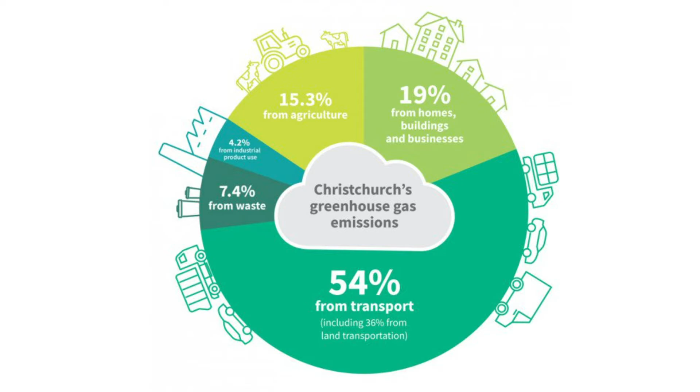So it's emerging that we need to understand where our emissions are coming from and what we can do to change. And I think what we're going to discover over tonight is that we have good knowledge and expertise in this area and what will make an impact in the built environment. And where we are coming unstuck is at the systemic level. It is our policies and our procedures that are leading us down. I think we'll leave here with a better understanding of the leverage points that we have to potentially enact a change. Thank you.

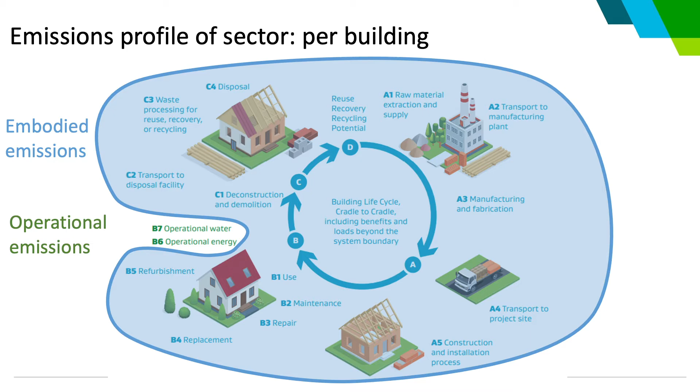But all of those life cycle stages have emissions associated with them, and the embodied emissions are everything in that blue cloud. The operational emissions are the green ones left out of it. The thing about embodied emissions is they're kind of hidden and indirect, and that's historically why they've been hard to measure—harder to see than operational emissions, which essentially come from your power bills.

So that's looking at emissions from the building sector on a building perspective. But what about for New Zealand Inc. per year? A few more numbers here. So what did we hit? 2.7 megatons for Christchurch. For the whole of New Zealand, our annual emissions are 69 megatons.

And our modelling has come up with a number of 15% of that 69 megatons coming from the use of buildings in New Zealand. That's broken down into embodied and operational emissions.

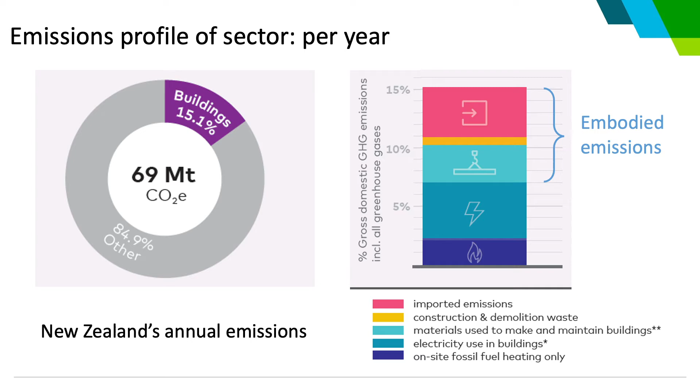So the operational emissions are the lower two bands. The dark blue is burning fossil fuels in the building. The lighter dark blue with the arrow is electricity we use to operate our buildings. But those top three bands are all your embodied emissions—the stuff from material in buildings, the stuff from waste in buildings, and the pink one is important: it's the stuff from material made overseas and imported into New Zealand. But that's still counted as emissions from the building sector, emissions that we drive every time we build a new building.

So what's the government doing about this? We're all hopefully aware of the Climate Change Commission. They published their final advice on how we're going to meet our zero carbon by 2050 goal a couple of weeks ago. That's going to result in the government responding by publishing a national emissions reduction plan by the end of the year—the government has to do this, that's what the Zero Carbon Act passed in 2019 said we would have to do. For the building and construction sector, we've responded by launching the Building for Climate Change programme, which is the programme I'm involved with in MBIE.

So last year we published two frameworks for public consultation. They contain proposals to regulate the operational emissions from buildings and the whole of life embodied carbon emissions from buildings. That's what I'm talking about now—Elrond will talk about the operational one later. So, whole of life embodied carbon emissions reduction, bit of a mouthful—I like to call it WOLEC.

The headline of the framework that was published is we're going to start with new buildings. Every time you build a new building, you have to tell us what the embodied carbon of that new building is. The next step, once we're all used to doing that, is we're going to introduce a cap on embodied carbon—you won't get a building consent until you can show your embodied carbon is underneath that cap. Then over time, we'll gradually reduce that cap in line with our national emissions reduction targets.

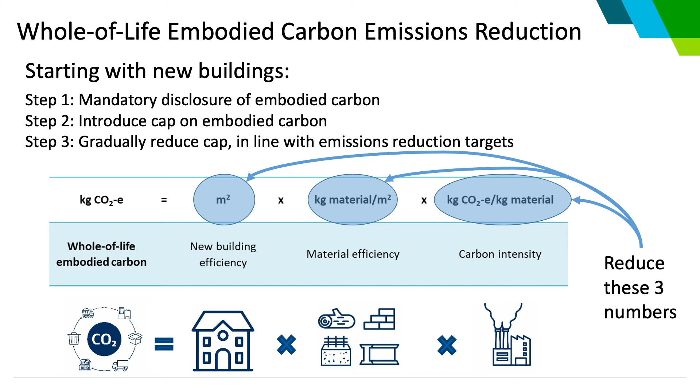It's the amount of stuff we build, that's the metre squared stuff. It's the amount of material we use to build that area, that's our material efficiency. And then it's the amount of carbon associated with that material we use. So in essence, everything we do to achieve the objective of reducing whole of life embodied carbon should link back to reducing one of those three numbers.

And I want you to think about those three numbers. Reduce those three numbers. So how do we do that?

I'm really glad we've already heard about the term carbon literacy. It requires a bit of number crunching and requires us to be more familiar with the numbers and the magnitude of the impact and what a kilogram of carbon means. So it's really important that it's not just for specialists, but for everyone involved in the building sector.

If we're going to do this, we need to do it together. We need to know what our impact is. It can't be something we package up into a black box and ask someone else to deal with. So we all need a kind of gut feel of what a good embodied carbon result for a building is over the whole of life. Because if we want to reduce that number, we're going to have to quantify it. We can't reduce something if we don't know where we're starting from.

But the good news is that there is growing interest in this. Popular science books telling you how much carbon is in your banana are becoming more and more popular. There's a growing interest in doing this. And what we want to try and do is empower people, give them the tools they need to do this.

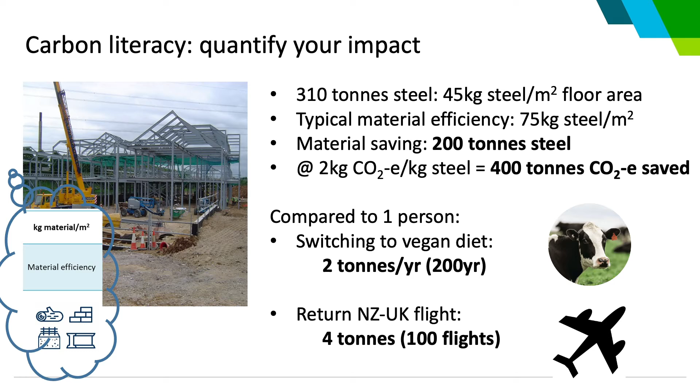And going at about 2 kilograms of carbon per kilogram of steel, that's about 400 tonnes of carbon saved. So going back to those three numbers, that's the middle number, material efficiency. By being able to reduce that material efficiency number, I've saved some carbon and I'm able to quantify it.

But what does it mean? So I could compare it to a couple of things. I could compare it to switching to a vegan diet, which is worth about 2 tonnes per year per person. So it's about 200 years, or 200 people going vegan for a year.

Or flying back to the UK to see my family, I could do that about 100 times for what I did on that building. And that's not to say we shouldn't all be switching to vegan diets and reducing our flights. I think what I'm just trying to illustrate is that in my role as a graduate engineer straight out of university, I had the power, and it's a real privilege, I had the opportunity to make that change and to have that impact in my day job.

And that's the sort of thing that everyone in the building sector needs to grasp hold of, understand, and take those opportunities. It's not a new thing. I like to use this example as what I'd like to think of as an early example of carbon literacy.

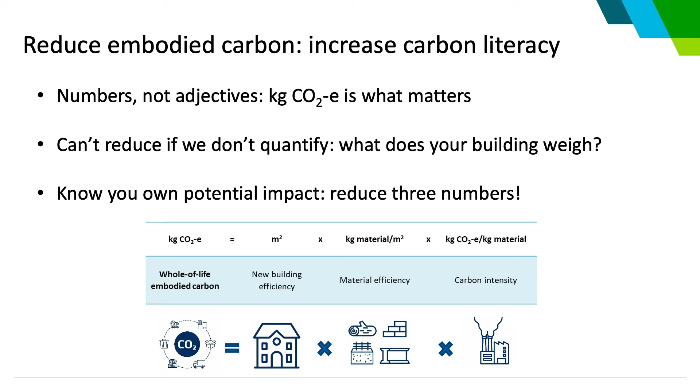So everybody who's involved in any way with buildings, know what your building weighs, and then know your own potential impact in whatever role. I've explained my role as a structural engineer, but there'll be all sorts of different opportunities for different people in the building sector to reduce their impact. So think about how you can reduce those three numbers. Thank you.

So, my name is Scott Watson, and for those of you concerned, I'm not on day release from prison. It's a different Scott Watson up here today. I'm Business Development Director, according to that, for Naylor Love. So I'm one of those evil builders that builds these carbon-emitting buildings all over the place.

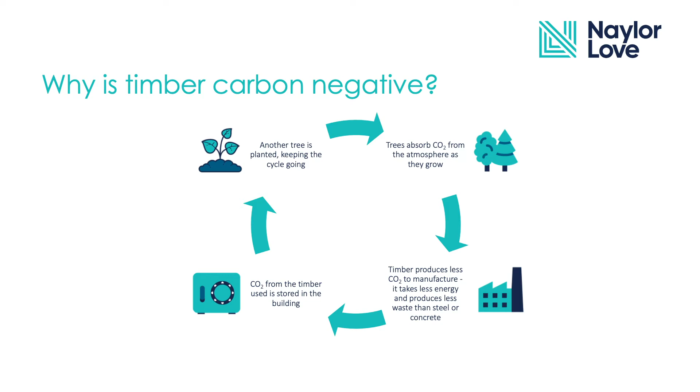We won't go back through the whole carbon cycle since we've covered that with other speakers, but the important bit here is engineered timber. We all know it sequesters carbon as it grows. We know it takes very little energy to produce compared to concrete and steel. And we know that as long as we plant another tree, the cycle continues. So if we chop down the Amazon forest and don't plant any more trees, we shouldn't be building out of timber. The sequence works as long as you continue to build out of timber.

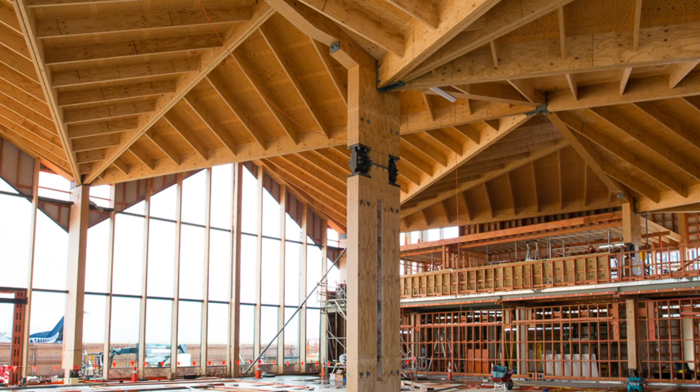What sort of stuff can we build with timber? Pretty cool building - that's the Nelson Airport. Full seismic load taken by the timber with these expensive little brackets here. The more simple structures - I think there's Rangiora High School, Redcliffs Primary School.

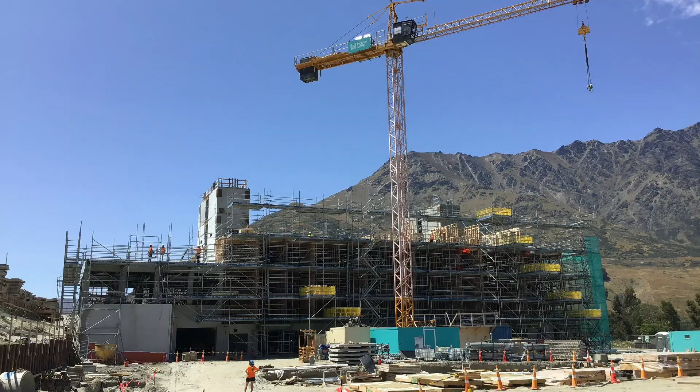This is a hybrid building, so you can see the concrete structure in the middle. What the concrete structure does is take the seismic load, and the rest of the building is timber, which takes the gravity load. Through the studies we've done, we've basically come up with that as being the most economic commercial structure to build.

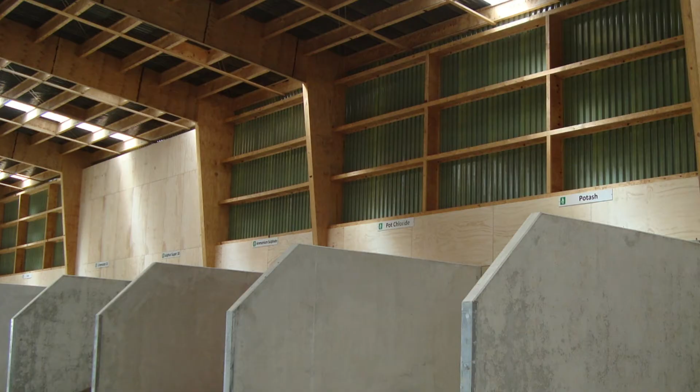Industrial buildings - this is a fertiliser works. We didn't build this to save the planet, we built it so it wouldn't rust. We got some brownie points though.

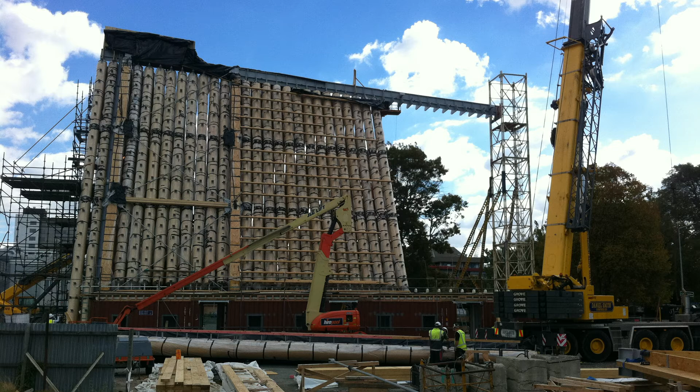And the Cardboard Cathedral, which is actually a timber hybrid building - inside every cardboard tube is a timber beam. Sort of like shooting Santa Claus, isn't it? Sorry about that. It's not cardboard at all.

What carbon savings can we achieve with engineered timber? So we set about measuring these. We took a sample building which you've probably walked past, Bedford Apartments.

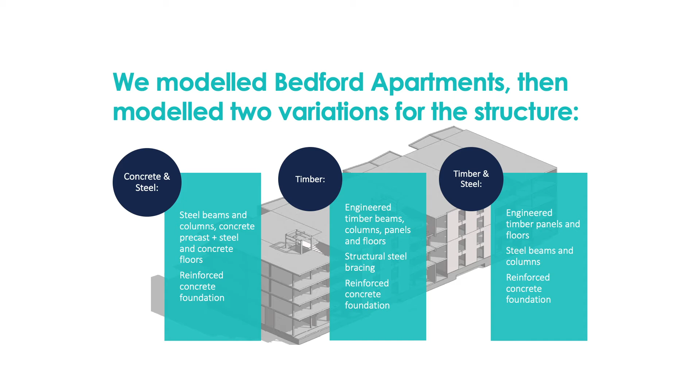These are just down the road - a standard, modest sort of 4 or 5 story building, quite correctly built out of concrete and steel. We then redesigned it in 2 different ways: a timber version, which is almost all timber but still had concrete and steel foundations, and a hybrid structure, which is timber and steel hybrid.

We then created our own carbon calculator, basically the equations we've been dealing with before, but we created a database of all the materials. So very briefly, when you measure these materials, there's the 3 different designs and the 3 different amounts of material. We saw that in the 2 on the right, we still have a lot of concrete and steel, so we thought the carbon saving would be fairly nominal.

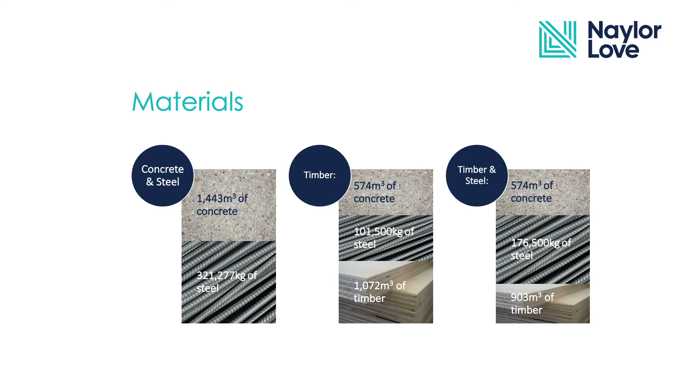Anyway, we carried on and the saving was over 90%. So even with a real modest amount of timber put into the building, you can see on the far right - sorry, left, no, you're right.

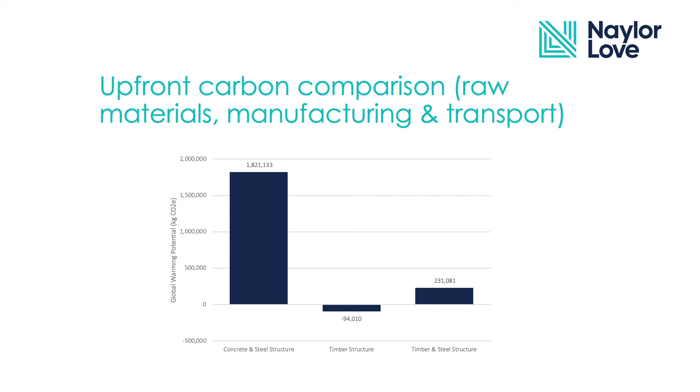The difference between the hybrid structure and the almost total timber structure is quite small, but the difference in cost is significant. For that particular building, the cost to build the hybrid, which is on the far right, is comparative to the concrete and steel. It's a little bit more expensive, but comparative. If we went to almost 100% timber, the cost goes quite high. But it shows with the hybrid structure you can achieve a significant saving.

Trying to do a comparator to that, for that one rather modest building, we were saving the equivalent of burning 1.167 million kilos of coal. So while it's great to do our hybrid cars and electric cars and waste control, we have to realise that just a nominal change to some of the building materials makes a massive effect on the environment.

It was at this point in time I had a Jacinda moment, which is not like me and actually quite disturbing. Come on, Jacinda, don't let me down.

That saving that we made was the same as 100 people, which is probably what we've got here, driving electric vehicles for 8 years. That's a lot of electric vehicles and a lot of people. All that saving was just done by one building, changing some of the materials to timber.

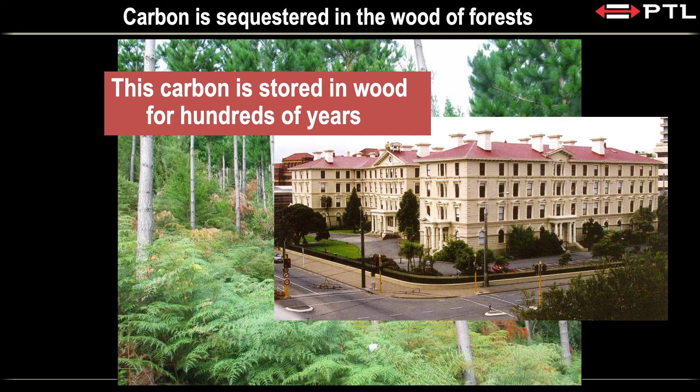Trees. This is the forest I own up in Marlborough. And what's in those trees? About half of the weight of the wood in those trees is carbon. There's carbon in those trees, and that's why people plant forests to sequester carbon. You can do lots of things with carbon in trees because it can be stored in the wood. And if you build a building like this, you know that building?

Old government building in Wellington. It's been there since 1876. I haven't got the numbers on that, but there are hundreds of tons of carbon stored in that building, and that carbon is in the building. It's not in the atmosphere.

If we want to encourage this, what I like to think about is something called a wood first policy. There's a little bit of history here, because way back about 15 years ago, when Jim Anderton was Minister of Forests and Deputy Prime Minister, he set up a wood first policy in New Zealand. Most people don't know about it. British Columbia followed New Zealand and set up a wood first policy. The state of Tasmania did the same thing. The city of Rotorua has done the same thing. What about Christchurch? Well, all of those previous places are timber towns, forestry.

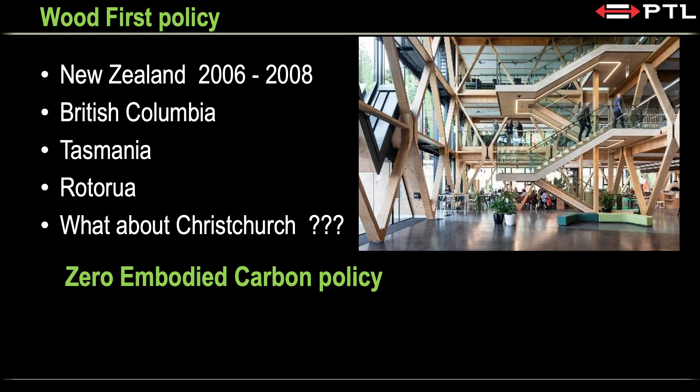I think in Christchurch we should have a zero embodied carbon policy. What does that mean? It means if we decided for all of our new buildings that the carbon sequestered in the wood offsets the CO2 emissions from making all the other materials in the building, that would be zero embodied carbon. It would just be what you'd seen from Scott and from Katie.

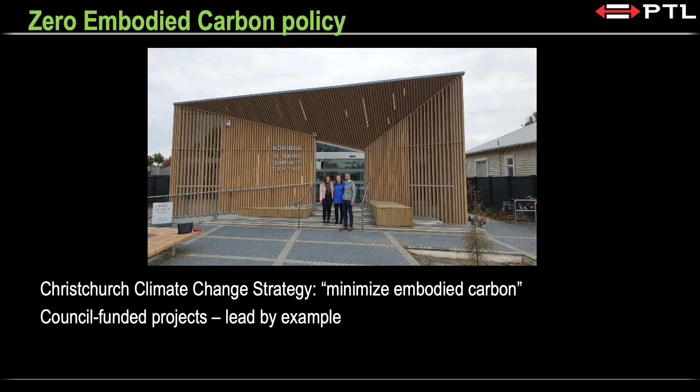As an example, let's look at the St Albans Community Centre, the same building shown on the brochure here. I was at that building at the official opening about 3 weeks ago, and our Mayor, Lianne Dalziel, opened the building, and I asked her afterwards, why didn't you say something about the carbon? Well, we heard about it tonight. Sarah told us about the carbon in that building, because that's how the building was built.

It's all built out of wood. There's no concrete in that building. It's got wooden panels for the floor and for the walls and for the roof. It's made of something called cross-laminated timber, for the walls and the floors. There's about 150 tonnes of wood in that building, which is equivalent to 180 tonnes of CO2 sequestered, the numbers we talked about. And the simple number I like to think about, I did a quick calculation.

If you drove your car for 1 million kilometres, this would offset the driving of your car for 1 million kilometres. It's a huge amount of carbon, but one's not enough. It's even better than zero embodied carbon.

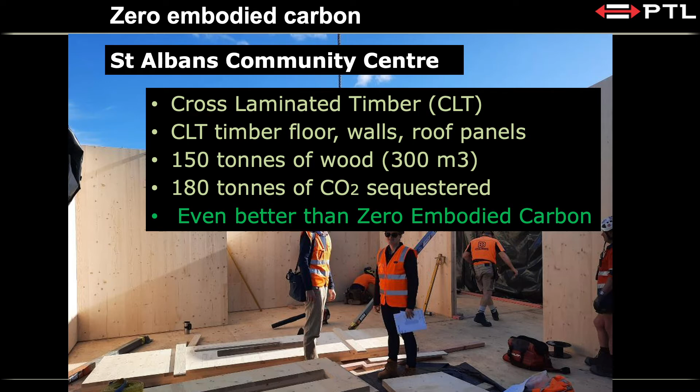It's carbon negative. So there are lots of other reasons for building in wood. The low carbon footprint, it's a renewable resource, lovely appearance, healthy environment, time and cost benefits, lightweight structure, earthquake resilience, top quality performance. There are lots of other reasons for building in wood, not just the carbon footprint.

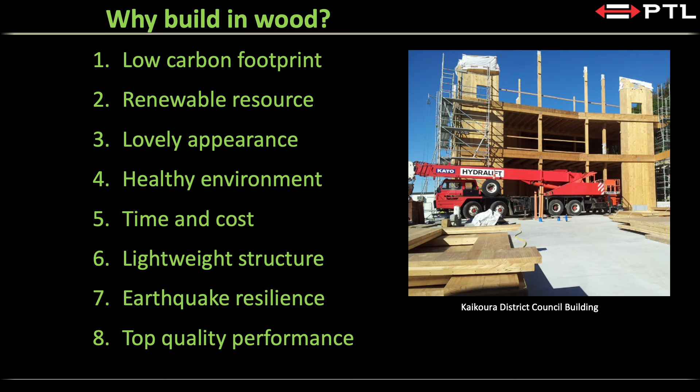But it's not so easy because there's a lot of resistance. So how do you get more timber buildings? Well, you lead by example, as Christchurch City has done with Mount Pleasant Community Centre, St Albans Community Centre and others. Then we have to support the public demand, encourage building owners, and celebrate the successful projects.

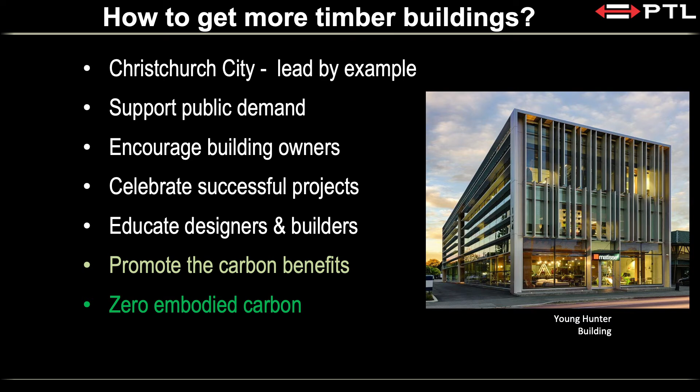With some education for designers and builders, and promote the carbon benefits and the concept of zero embodied carbon. Here's another building on the right, the Young Hunter building down next to Vic's Cafe, Victoria Street. That is all a structural timber building with zero embodied carbon.

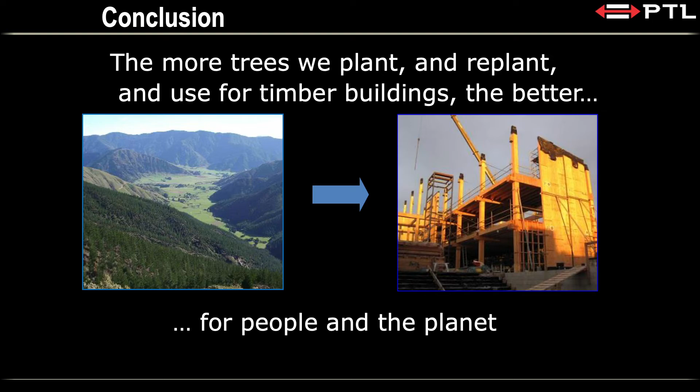So my conclusion simply is this: the more trees we plant and replant and use for timber buildings, the better it is for people and the planet. Thank you.

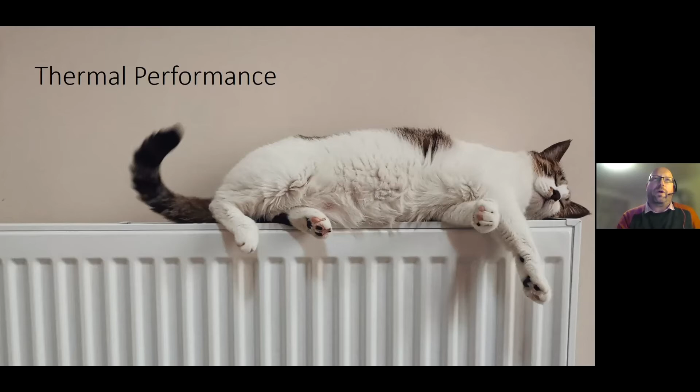Then the other aspect of thermal performance, which is really important, is that it relates directly to the health and well-being and how we experience our buildings. I think one of the things we've got to really keep in mind all the way through this process, as was touched on by one of the very early speakers, is that buildings are for people. So people need to be at the centre of what we're doing when it comes to climate change action and the way we design and build buildings also.

It's quite possible to think about low operational emissions for buildings as being about putting another jumper on and trying to keep warm in a very poor indoor environment, which I think most of us in New Zealand have grown up with. I grew up in Canterbury, just outside Christchurch, so I'm quite familiar with very cold winters, wearing more layers of clothes and seeing my breath in the morning.

But that's not what we want to achieve with this operational efficiency being brought in as part of building for climate change. We want to see that as buildings get more energy efficient, indoor environmental qualities - how warm and dry and well ventilated they are - are also improving at the same time, not being compromised. And these things have a relationship between them.

If we want to simply improve indoor environmental quality, we should probably just heat and ventilate our buildings a lot better than we typically do. But if we do that, we inevitably use more energy because we have to use bigger heaters, more often.

If we go the other way and say we just want to reduce energy use and operational emissions without thinking about the other things, you can have a negative impact on indoor environmental quality. Even if you put another jumper on, if your house is cold, it's not going to be good for your health or well-being.

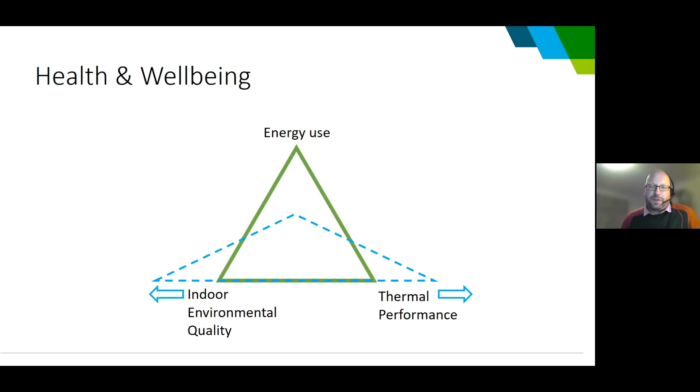I wanted to touch on a couple of things Katie already picked up on. Other things the government is doing in this area include a carbon neutral government program, where all ministries and agencies need to reach carbon neutral in their operations by 2025 — I believe this also impacts local governments. This means reducing operational emissions, reducing embodied carbon emissions, and then offsetting whatever remains once they've achieved the reductions they sensibly can.

We're also looking at energy performance certificates. These have been brought up a number of times — it's a way of rating a building to show how well it performs in terms of the energy needed to keep it at a good temperature with a healthy, comfortable interior.

All the different parts of government are responding to the Climate Change Commission's final report, with different aspects covered there. This year there's a lot of work being done on the emissions reduction plan, which we expect to be published later this year. So that's a brief overview of operational efficiency, and I'll pass on to the next speaker.

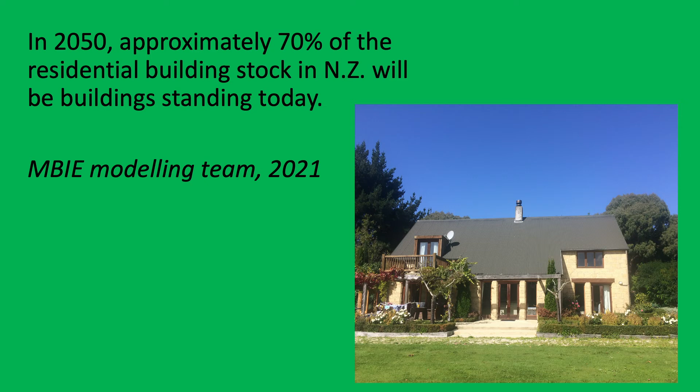So in 2050, 29 years from now — that's about my age — I understand from some figures Katie's team gave me, from their modelling team, approximately 70% of the residential building stock in New Zealand will be standing, or will be the buildings that are standing today.

New Zealand statistics indicate there are about 1.8 million dwellings currently standing. Now, we're going to have growth and clearance, but for the sake of this presentation, let's just say the same amount will be around in 2050. So in 2050, about 1.25 million dwellings will be from 2020 or earlier.

This is going to be a similar position to other developed countries. So it's critical, in terms of reducing energy use and achieving our greenhouse gas emission reductions, that deep retrofits are carried out on existing stock.

Right, you can quote me on that, because I said it, okay? That's my quote. Everyone now needs to be an activist right now, not tomorrow, not in 5 years' time, right now.

Renovate, refurbish, rehabilitate. It's likely that if we shift our focus almost completely to the rejuvenation of existing buildings, and have the reduction of energy use at the core of that focus, every project carried out will be a retrofit project. And they have to be, because we don't have any other choice.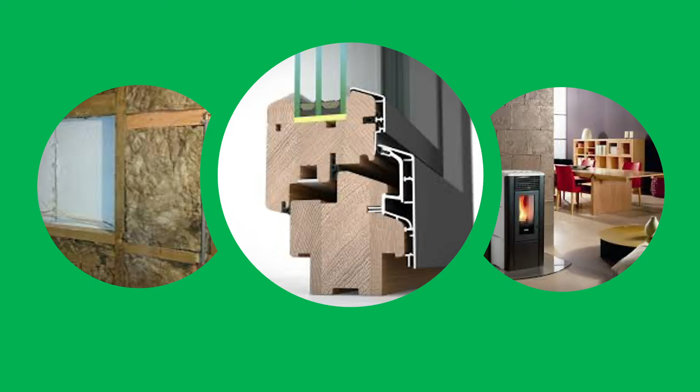If we think about retrofitting just in the residential sector, we can just consider things like swapping out single to triple glazing, putting insulation in walls, roofs, anywhere you can fit it, and perhaps whipping out the old open fire for a wood fibre pellet equivalent.

In the commercial sector, wrap up buildings with external insulation, put on new veneers, finish off with new glazed balconies.

This project I co-managed back in 1998 in Norway: 3 tower blocks, 10 stories, 200 plus apartments. It was award-winning, but they didn't tell me at the time until I left the country. I found out 2 years ago.

Conventionally, such refurbishment work is focused on a number of single-step measures which overall improve the performance of a building, either deliberately or unintentionally. But there's generally little thought in promoting the improved performance, how it might be demonstrated, or how it will benefit stakeholders, either immediately after the works or during the remaining life of the building. And the benefits of retrofit are unlikely to have been determined at the design stage. And the influential assessment criteria upon which the project has progressed is generally cost versus asset value growth.

This is just sort of standard retrofitting, just adding something that wasn't there before. The long-term benefits to occupiers or owners will initially be largely only perceived and found on subjective reasoning rather than the consideration of demonstrable outputs from the setting of measurable targets.

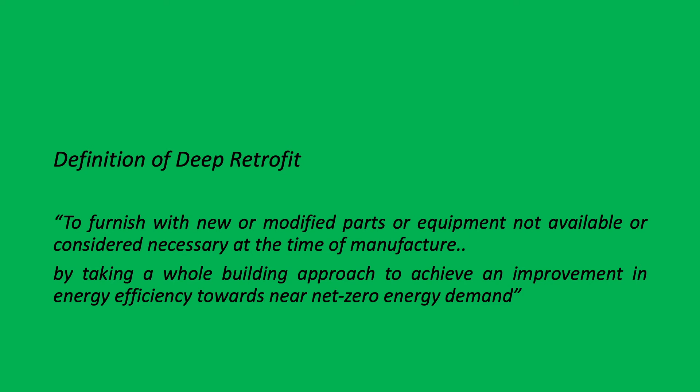In addition to the definition of retrofit, I've added taking the whole building approach to achieve an improvement in energy efficiency towards near net zero energy demand. And now we're wanting to start focusing on performance and reducing energy use.

This picture has been taken from Archetype's website. Thank you, Tim, and the team down there in Dunedin. They looked at retrofitting an apartment flat, I guess, or an apartment in a block.

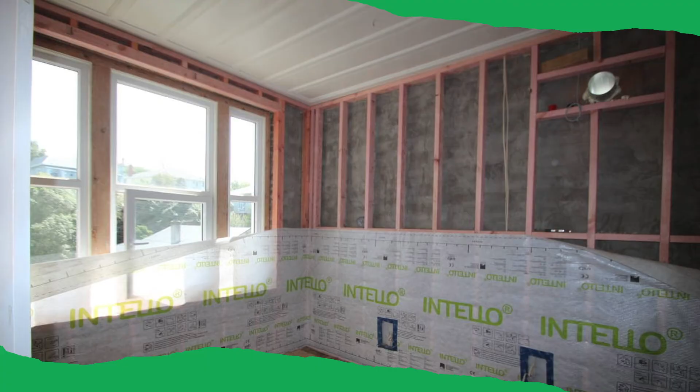And here the people have started going a bit more hardcore, stripping out plaster from external masonry walls, putting in new insulated timber walls inside the envelope, airtightness membrane, up with the floor, more insulation, more membranes, and so on and so forth. Whopped in some through-the-wall MVHR to reduce moisture build-up and to warm the incoming fresh air.

And further along the residential line, Kāinga Ora have already retrofitted 200 homes in the Hutt Valley, and they plan to retrofit 1,500 more in the next 2 years, as part of one of their performance-focused retrofit projects nationwide.

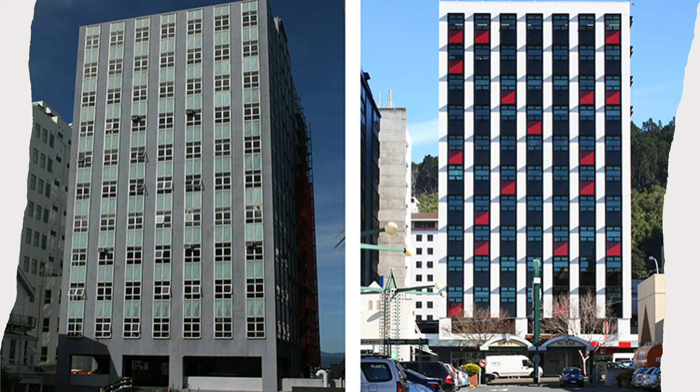Deep retrofit in the commercial sector. This is about 10 years old now. It's Aorangi House in Wellington. It was a Beca project, 2009. And they basically added the things that were on the project before in Oslo, but gone infinitely further.

Installed external insulation and new veneer, high-performance glazing, solar shading, temperature and air quality sensors, exhaust fan to aid ventilation, variable refrigerant flow comfort cooling design, and worked on the elimination of thermal bridges.

So the whole performance of the entire building is considered - in this case, the performance analysed for optimisation during the retrofit.

If you haven't checked out Professor Johan Rockström, go and check it out.

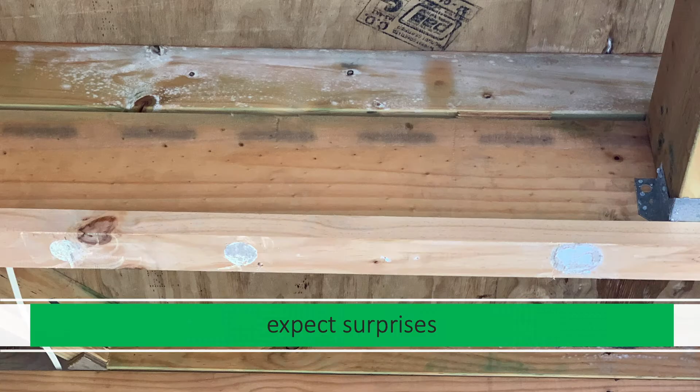The final stage really was just looking at passive house style retrofitting at EnerPHit. One example here was Piha House. They're looking to certify it this year. It's by Sang Architects, Daryl Sang and his team up in Auckland, and it comes with the need to expect surprises and pay attention to a lot of details.

And I'll just leave you on that note.

Kia ora koutou. My name is Shay, and I'm the head of strategic partnerships at Tether Limited. Prior to Tether, I led the development of the Environmental Upgrade Finance Program in Australia.

Tether provides hardware for measuring building performance, and our devices are very easily installed. It can be done in 30 seconds. They run on batteries and do not rely on Wi-Fi connections to transmit data.

So today I'm here to talk to you about PACT, which is Property Assessed Climate Transformation. PACT is a loan. It is secured by a voluntary targeted rate on the property. It can be used by homeowners as well as businesses.

The term of the loan can be up to 20 years, and the interest is fixed for the duration of the loan. The loans range from a few thousand dollars to millions of dollars, and the funding is provided by the private sector. It can support building owners and tenants too.

PACT overcomes financial barriers that typically discourage investment in retrofits of existing buildings. The long-term tenure of the loan makes the loan repayments easy, and therefore it becomes a cash flow tool for the building owners. In particular, it could be used for healthy home upgrades, green retrofits or deep retrofits, as well

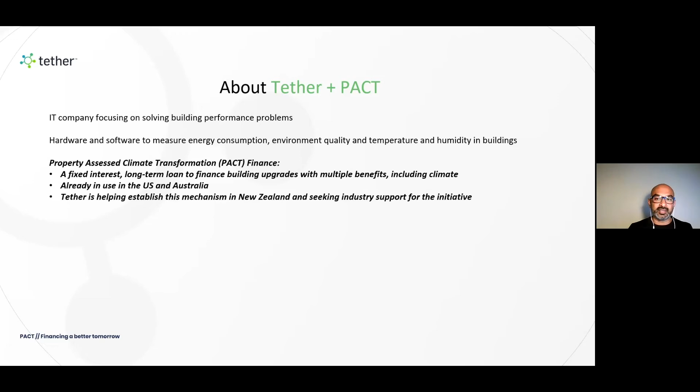Similar finance mechanisms are also under consideration in Europe, UK, Canada, and South Africa too. It is enabled by a tripartite agreement between a building owner, their local government, and a lender.

Voluntary targeted rate programs are already operating through Canterbury programs and building retrofit programs in Auckland City. PACT is very much aligned to these programs and can also be used for non-residential buildings. It also allows for a wider range of improvements so long as they deliver a healthier space and a more efficient building, and the funding is not limited to council budgets.

I'd like to run you through a series of examples of projects that have been funded by similar finance mechanisms in Australia and in the US.

First, we have a commercial building refurbishment. This building was built in 1936. It's in Melbourne CBD. The building had aged and had a poor NABERS rating. The building owners used bank loans and environmental upgrade finance, which is what PACT is. And they were able to do deep retrofits and lift the NABERS rating to 3.5 stars, which enabled them to source a long-term tenant. We work on a 15-year contract.

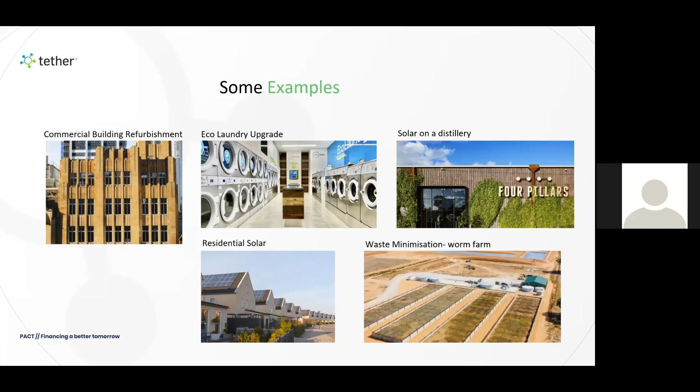So what they did is they installed 4 swimming-pool-sized worm farms at the cost of $4 million. And those worm farms treat 120,000 kilolitres of water, and that gets put back into the irrigation system each year. Prior to this, that water had to be trucked down to Melbourne for treatment over there.

And the last one I want to talk about is called the Residential Solar Program through PACE. So this is where this type of funding originated in the US 10 years ago. To date, for residential projects, they have transacted for over $7.3 billion, and that is across 300,000 homes in the US.

Commercial PACE started a few years later, and to date, they have transacted over $2 billion worth of building retrofit projects. And the biggest deal was signed earlier this month for an $89 million commercial building retrofit on Wall Street. So from this, you can see that the usage is from very large businesses to small businesses, as well as homeowners too.

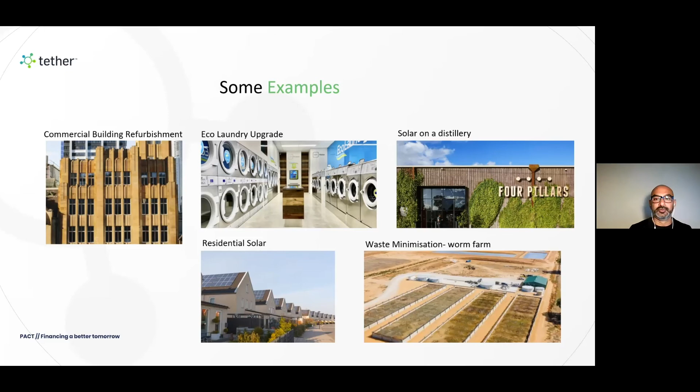So in the last 6 months, we have been undertaking a series of stakeholder engagement activities. We've written letters to the Minister for Local Government, as well as Minister for Housing. The rationale for that is that under the current Local Government Rating Act, councils can put VTRs on council-funded projects, whereas for PACT, we're looking at the private sector to provide investment into these projects, and that would require some amendments to the Local Government Act. We've also sent a briefing paper to the Greens Party, the National Party, and the ACT Party as well, and I've been advised that it's been forwarded to the Minister for Building and Construction as well.

How can you help? I'd encourage you all to talk about this PACT to your peers, to your local governments, to your banks, and any projects. For consultants in the room, if you're working on projects, you can identify projects that could be suitable for this form of finance. Please send me an email or give me a call. I'd be happy to talk more about it.

The briefing paper that we sent to the government will also be available to anyone who's interested after this presentation tonight. And also, if anyone is interested in downloading those full case studies, I'll be more than happy to share the link from where they're available. Thank you very much for your time.

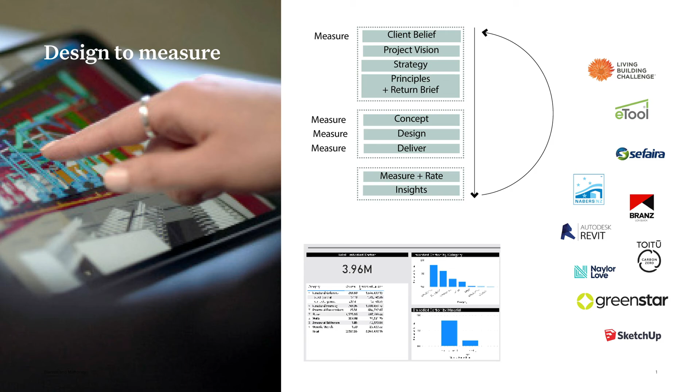We're rapidly moving from a design based on intuition and experience to data and insight-led design optimization. We need to be able to measure our emissions from our brief to our documentation. We've never had to do this before, and the tools to do it are slowly developing.

To help us determine what good or even normal looks like, last year we partnered with a PhD candidate, Emily Newmarch.

Emily analysed our design for Mason Bros on Auckland's waterfront. Completed in 2016, this building achieved a 6-star Green Star built rating for office, which is the highest rating, with a 5.5-star NABERSNZ energy rating, which is out of 6. So it achieved really highly in terms of rating systems.

Our engineer calculated that over its lifetime, this building saves approximately 50% of greenhouse gas emissions, which sounds fantastic. By the current tools, this is deemed world excellence and is really hard to actually beat.

Emily's analysis found that this building had a 40 to 60% split on operational compared to embodied carbon, placing a greater importance on embodied carbon than a typical building due to its energy efficiency.

Today, we understand to stop irreversible climate change in the next 8 to 10 years, reducing the total embodied carbon emissions, especially up front, is critical.

When Mason Bros is assessed through this lens, it measures about double our goal, which is roughly international best practice per square metre. Which sounds bad, but it's not actually bad because it depends on the typology, and an office building might be 40 storeys and this is 3. So it gets really complicated quickly.

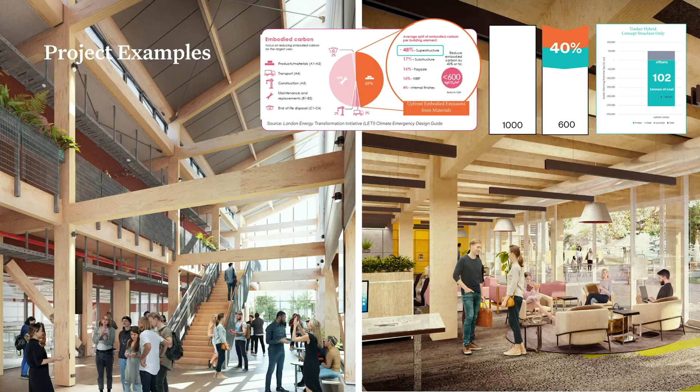So let's look at a current project. On the right-hand side, I'm going to talk about that project. This is an office design where our brief was to see if we could make a timber structure feasible for a B-grade office building in Ōtāhuhu. We spoke to a contractor early to minimise the risk.

They suggested, rather condescendingly, we should make the floors concrete for many logical reasons. The client was forced to defend the design team and explain what our brief was and why a low-carbon build was important to their organisation. We brought in a more progressive contractor for some insights, and the design team came up with a low-carbon, rational, and we think beautiful proposal. And we used the Naylor Love tool to demonstrate carbon sequestered in the structure.

But in order to be funded by banks, the project needs a business case. The concept cost estimate for the business case is provided by a QS, whose job it is to put a value against the known as well as the unknown. The perceived unknown risk of timber construction in the market right now blew the business case out of the water in one foul swoop. If it weren't for an absolutely determined client, this project could have fallen over at this point, and many do.

Despite the architects, engineers, contractors and client all going above and beyond, it is no guarantee of success yet. And this is because we're still operating within an ecosystem that defines success by cost, time and quality. We need to shift the whole construction ecosystem to adjust for a new value: carbon.

This in itself isn't a technical challenge, rather an adaptive challenge. An adaptive challenge is achieved by overhauling people's priorities, beliefs and behaviours. It calls for productive conflict and tolerating loss as the whole system learns through experimentation and innovation. It won't be enough if we have legislation but don't provide education, financial incentives, or address existing barriers. If we're not careful, it might even make it harder or more expensive to build houses.

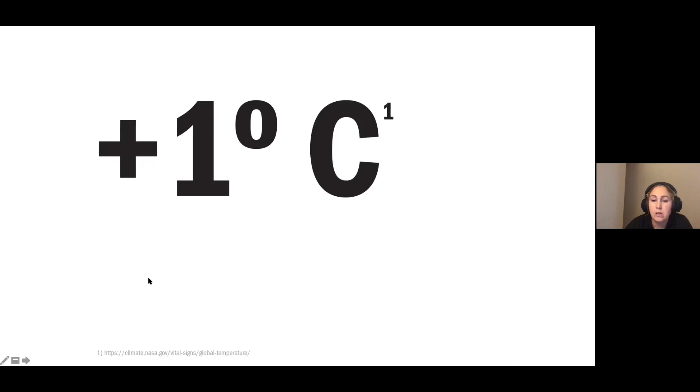So a few quick snapshots to set the context. We're already well into a climate change process, with average global temperatures now up by 1 degree from pre-industrial levels. This elevation in temperature is very significant. Recent research has raised the possibility that even a 1.5 degree elevation in temperature may start to initiate tipping points that further fuel change. We're also now up to around 416 parts per million in atmospheric carbon dioxide, which drives climate and ocean heating and sea level rise.

And climate change isn't the only challenge, obviously. We're also now in a 6th mass extinction event with wide-ranging biodiversity collapse. Biodiversity is the life and the life support system of the planet, and so this is just as much of an existential threat as climate change and global heating.

Housing crises, obesity epidemics, which are linked to obesogenic built environments, and likely the current pandemic are all linked with our current land use and building infrastructure systems and choices. The scale of these crises are global and they're interlinked in complex ways, but the opportunity here is to emphasise holistic wellbeing, or mauri ora, and actively design and build for socio-cultural ecological wellbeing.

This is an opportunity that we can particularly engage with at an urban level and in our neighbourhoods. So what is effective? In our urban wellbeing research, we're identifying a wide range of socio-cultural and ecological wellbeing strategies, and we're exploring how to land these on the ground in urban neighbourhoods. We need tools to help us understand and visualise different wellbeing strategies and how these can interrelate and create synergies.

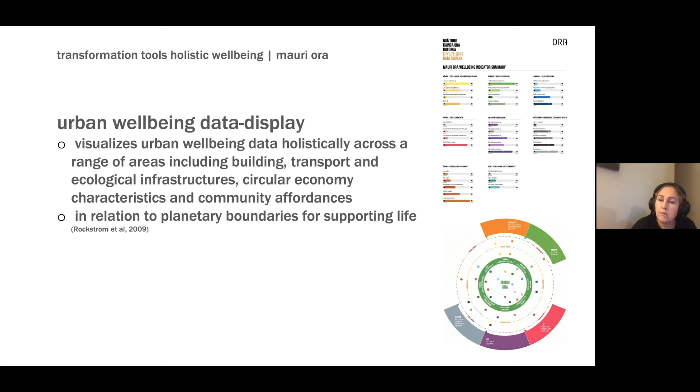We're also developing a holistic wellbeing compass that visualises the city as a complex whole. Again, we depict key urban wellbeing approaches or actions and domains: built environment, transport and ecological infrastructures, circular economy and connected communities. With Huri Te Ao, the Future Environments Architecture School, we've just started a process of co-developing a compass

to help teach architecture from a perspective of holistic wellbeing. We're emphasising an approach which always locates architecture within its neighbourhood and ecosystem. The aim is to help students understand how to design zero-carbon, living, regenerative systems by providing key strategies or directions.

For example, in the Kainga Ora Built Environments domain, the ochre-coloured pie section, we highlight the importance of local renewable energy generation and storage as part of a building energy ecosystem. This overlaps with the Kore Ora Zero Carbon Active Transport Strategy, the khaki coloured pie, which emphasises active and public transport along with zero emissions vehicles.

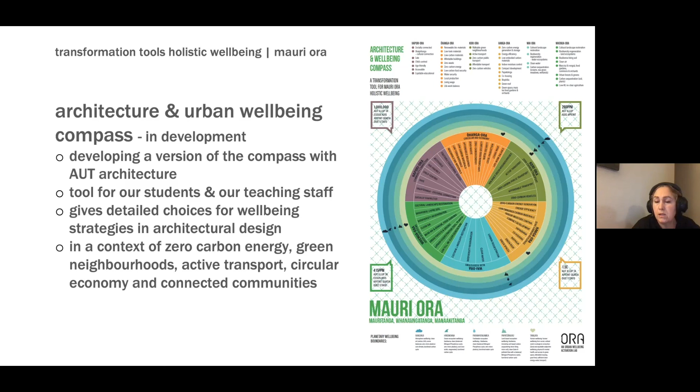The green Whenua Ora Ecological Infrastructure section emphasises the importance of urban ecological regeneration to store carbon and enhance biodiversity in a more resilient life support system, and also to improve the wellbeing of people via the biophilia effect. Research shows that people's wellbeing is measurably improved by proximity to green spaces, and that disadvantaged children's resilience is particularly improved by access to nature.

The compass brings together local and global wellbeing approaches so that students always consider how their local choices can have global effects. Global wellbeing boundaries, the outermost circles, reference Johan Rockström's planetary boundaries idea, which emphasises the need to work within existing planetary cycles and capacities. Our local, urban and architectural actions in the centre need to occur within the circling planetary boundaries, within the carbon cycle, within ecological limits, for example.

The compass emphasises the need for a just energy transition to renewable energy, a land use transition which allows for ecological regeneration, and a materials transition to a circular bioeconomy.

So to finish, this is a challenging time for the built environment industry and for cities, but it's also a time of great opportunity. Because of the complexities and interconnection of the challenges, we need to take a multi-pronged and holistic approach. And we need tools to understand and visualise wellbeing opportunities in urban interrelationships.

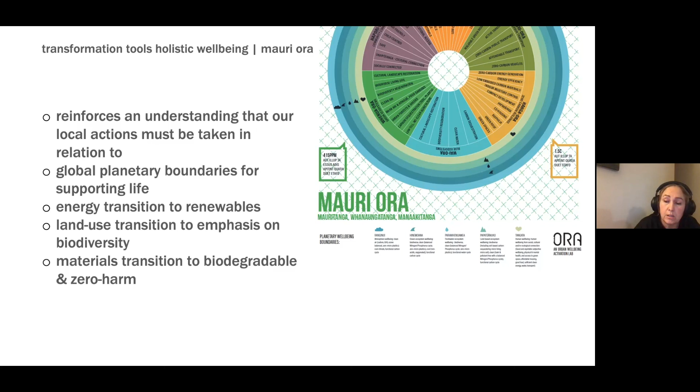This compass is one tool we're creating. We're about to begin using it with AUT's Architecture School. We hope that this approach will assist architects of the near future to design ecologically regenerative, carbon negative, living buildings and cities. Kia ora mai tātou, thank you.